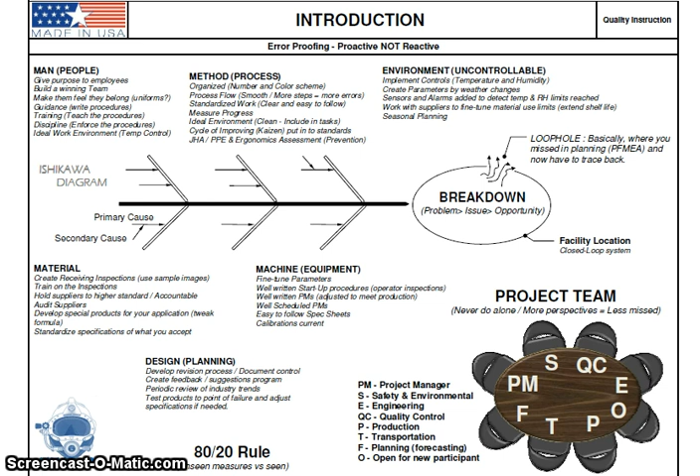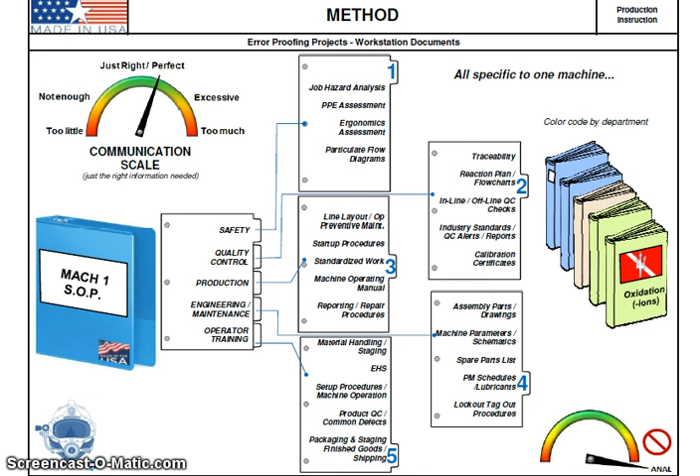Again, your SOP binder at the workstation—what all it should contain. Information on quality, the coding system you use, how to develop the coding system. There's a lot of different ways, so whatever works for you. You have your standard work, SOP per operator. There's always a right way to do something, and also use pictures to make it easy to understand.

When I was back with Trim Masters, we had the TEMA audit—Toyota Engineering Manufacturing Association. You get a bunch of engineers forming a half circle around you, and they start firing off questions. One of them said, I want to come in off the street and know how to do that operation just by looking at it. So we had to simplify as much as possible. Basically it comes down to worst case scenario—someone's on vacation, someone else calls in sick, and you're using your third guy backup who's not too familiar with it. So anyway, that's what this is about.

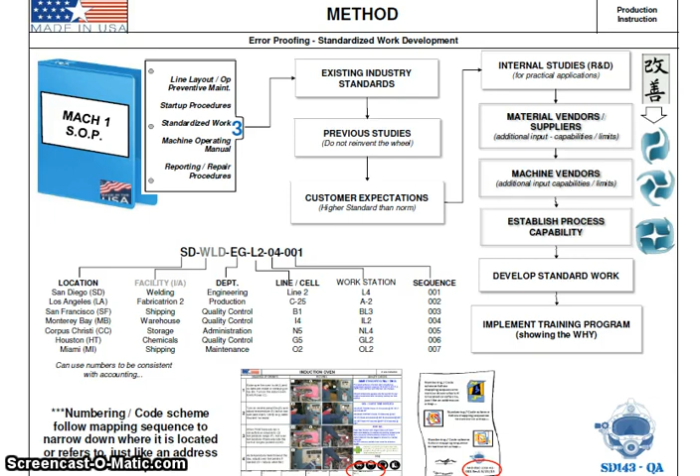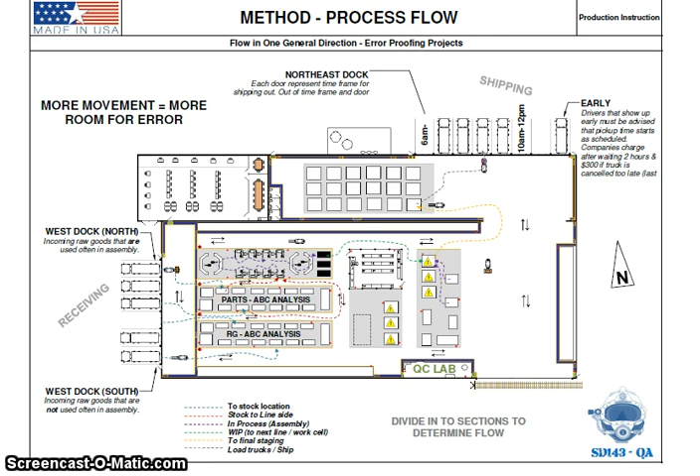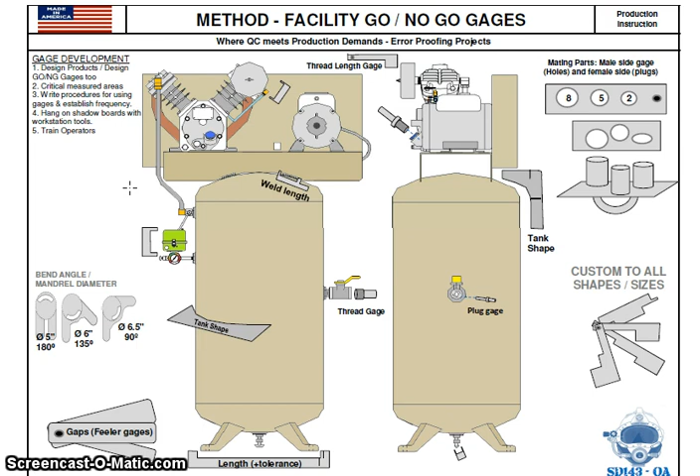Anyway, here's this one—this is go/no-go gauges. You can pretty much make any go/no-go gauge for anything. So here's just some ideas on what you can make or use. This falls under waiting, so it speeds up your time in your QC checks.

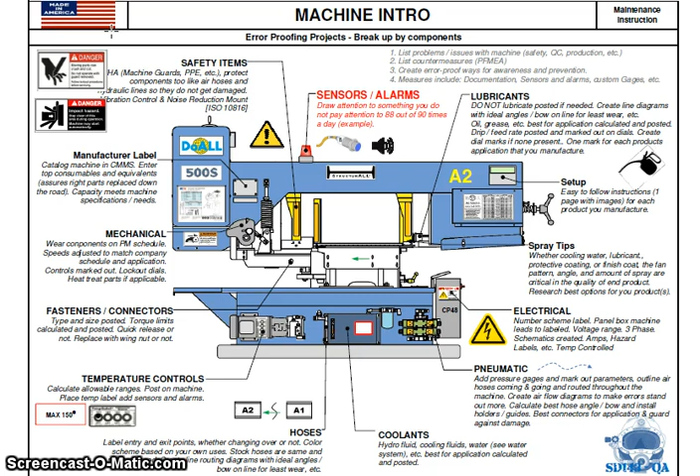Machine information, basic—everything you need to cover for the machines. This is just like a big spec sheet, something to follow, a guideline of what all you need to do. This takes some reading, so feel free to pause it and read on.

Again, just feel free to pause and read.

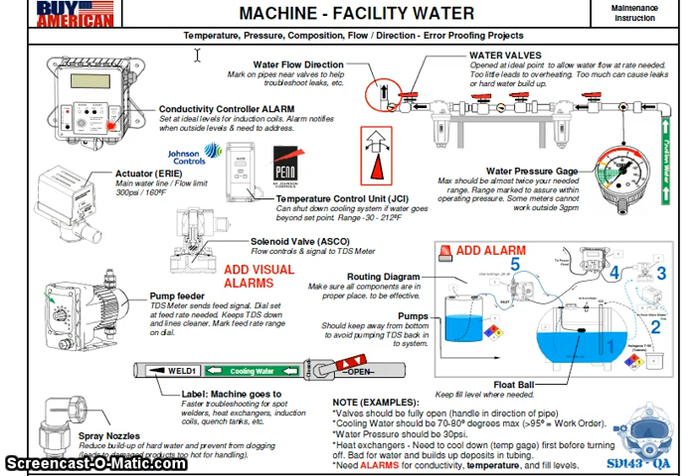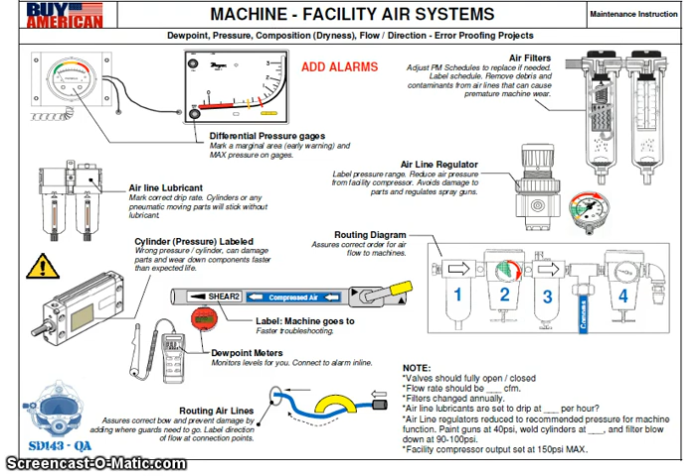So anyway, feel free to read on this, give you some ideas for error proofing for your facility. Feel free to use it. Doesn't matter to me, you know, it's copyrighted, but I had it a while back, so I don't really care.

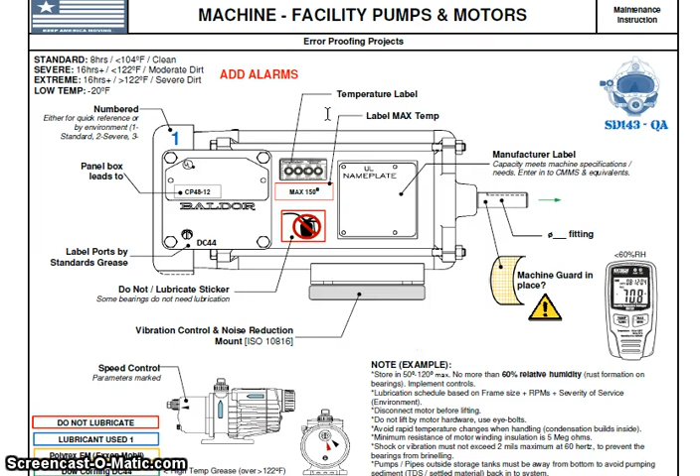What it is, they're called dowel bars, and you have a big machine called a dowel bar inserter. It puts these big steel bars, 1.5 inch diameter, 18 inches long, into the roadways. Caltrans is really being particular on the edges, because epoxy's characteristic is to flow away from sharp edges, and they want to make sure it has the best coverage possible.

So that was one modification, and now it helps prevent the dowels from rusting inside the bridges and the roadways and your airport runways.

What else? Pretty much just, anyway, just read on if you want. Here's all your information.

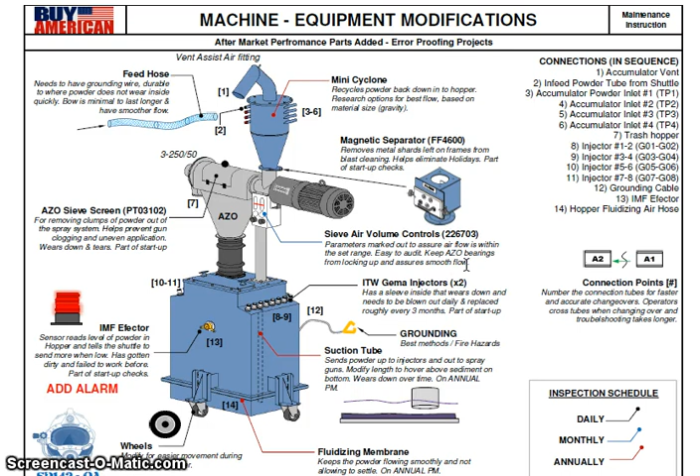That way, whatever material you're using, this is a bond breaker. Again, it goes on, like a wax. It goes on the dowels so they move inside the concrete when you get that thermal contraction and expansion between the slab joints, otherwise the concrete will stick to it and crack the concrete, and you don't want any cracks. Otherwise, they'll be digging it up and charging you for it.

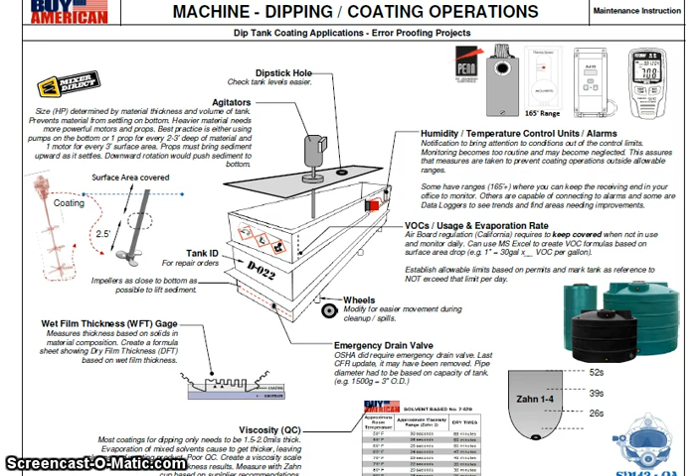So anyway, here's some ideas for an above ground dip tank. Paint booths. Here's an idea for some paint booths, some of the error proofing methods you can try.

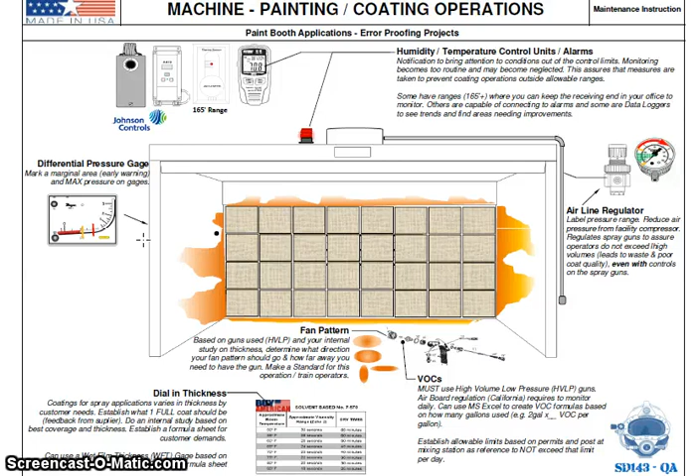Even though you have your adjustments on your spray guns, you know, if it says 40 psi, maybe install an airline regulator anyway and put it down to 40 psi, and don't rely on the operator to adjust the gun, because that usually never works, especially because usually it's a new guy that you put on here. So anyway, you can pause it if you like.

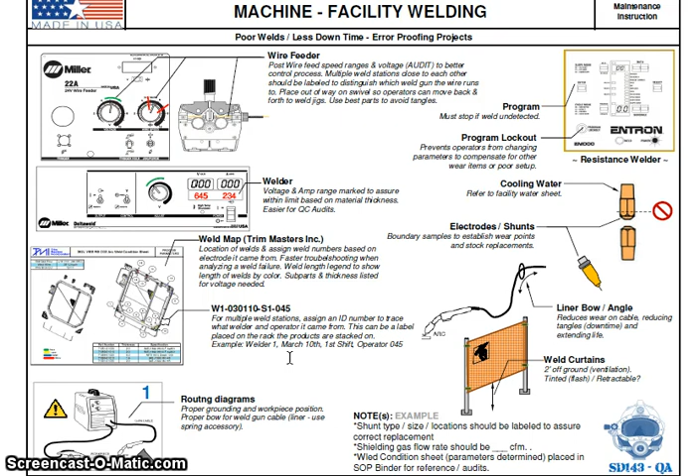Mark out your gas flow meters. I don't see my gas flow on here, but there's the gas flow meters too. You can mark out with your floaty ball the right position for the flow of your shielding gas. Here's another Trim Masters example. This was a little sheet we had, a weld map outlining where all of our welds go. It's been so long since I've used it, but I don't think it'd be a problem to show it here. Just read on and pause if you like.

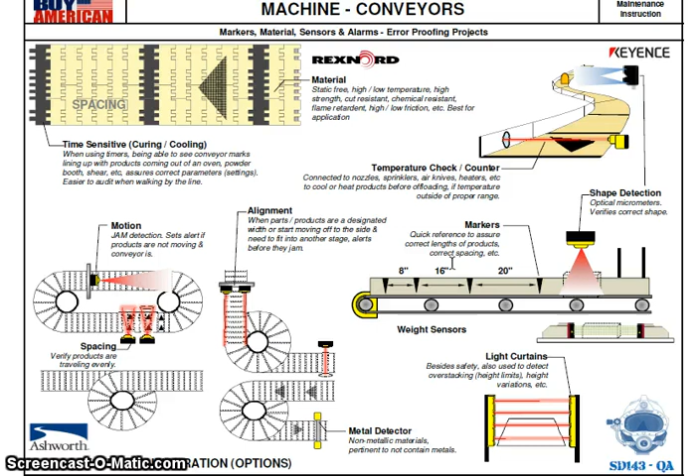Conveyors. A big help here is Keyence. These guys will actually come and do a free demo. They're sales engineers, I believe they call themselves now. There's so many of the guys we talk to, each specialized in something different - one's in safety, one's in error proofing, I don't remember exactly all their titles, but they've got cameras and sensors for everything, and you'll always find some way to use it in your applications. Feel free to pick up some ideas here. Call your local reps, even other companies that make sensors, and have them come do a demo for you.

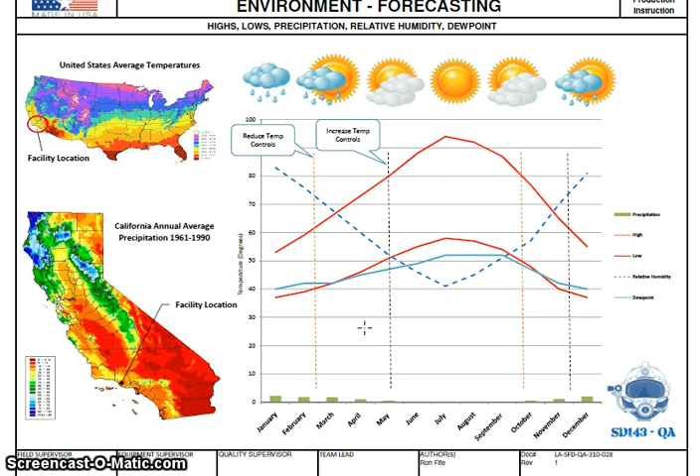Environmental forecasting - this is to save you some money. When the temperatures drop at certain times of the year, you can reduce your temperature controls, then increase them again later. You've got this whole time frame within here, and you can actually save some money. Just some ideas for you.

This is just for training, to eliminate as much error as possible and make it very easy to follow. This is the same thing as the work point sheets, the SOPs. Just make them easy to follow, I guess is the way to put it.

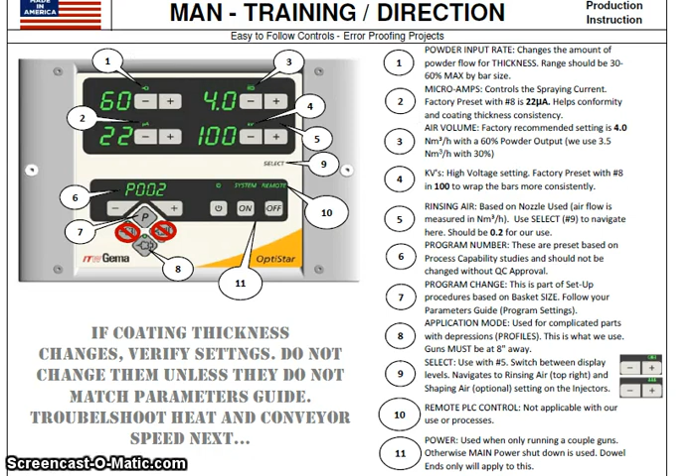Here's another one, just for instructions, to give you some ideas. You can outline it, do your screenshots, and then put numbers showing what each one does and what to do.

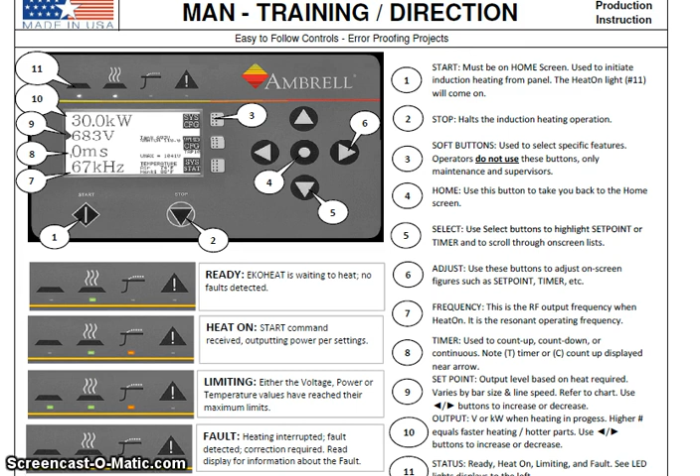In a panic, you always want to make it as easy as possible, because somebody's panicking, trying to look at the controls, and they're kind of new at the station. You don't want them really messing it up or making it worse.

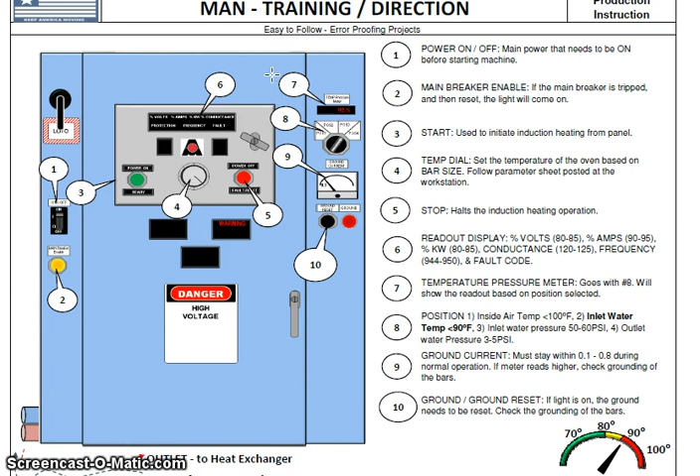Here's another one - just a little cartoon image of the entire panel itself. This is all done in Excel, Microsoft Excel, using that image bevel effect or whatever to kind of give it that look.